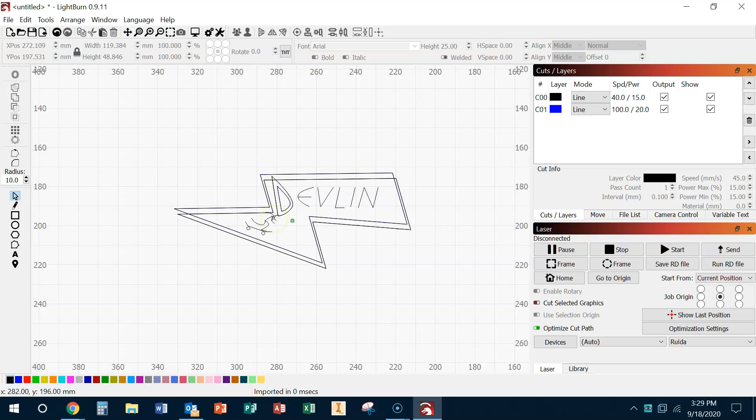When I load this in, it just brings it in as lines, which is fine because that's technically what we want - vectors. There's no colors; the laser printer doesn't have a color.

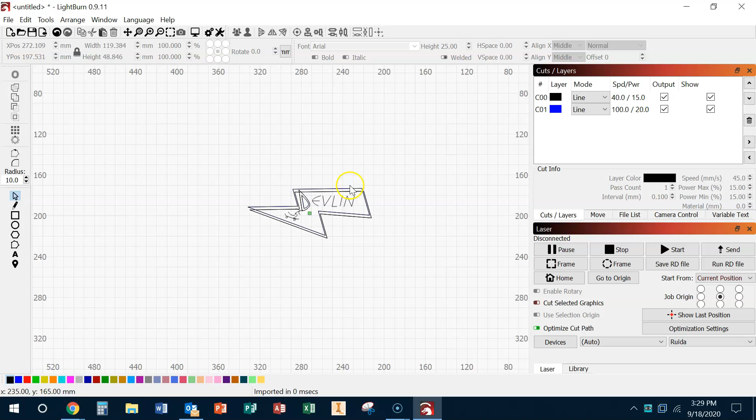So we have this, but what has happened up here is we now have all these layers and cuts. This is dependent on what we're 3D printing or what we're actually cutting. We control the speed and the power and whether it's outputted or not.

So one thing I like to do to keep it manageable is I'll normally make a square. Because Lightburn is not an American program, it'll stay in millimeters. Up here we have my rectangle that I just drew, dashed. I'm going to make this 4, and I can type in inches, and the longest dimension I want these to be is 4 inches at first.

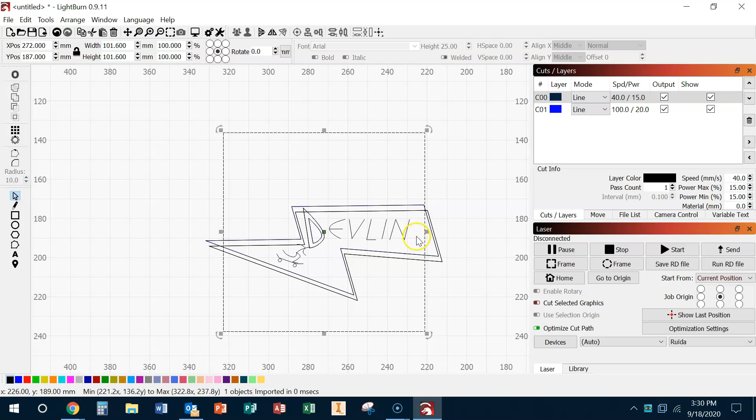It's going to keep that rectangular shape unless I click the lock. So then I can put 4 inches down below, making this a square that I want to keep everything inside of. Since we're not using very much of the 4 inches, if you really wanted to max it out, I'm okay with you squeezing this. But we just want to make sure we're not printing something super big.

So you can either delete this, or if you change the color of it - I'm going to change it to yellow - that will take that box and put it on its own layer, and I'm just going to unclick output, so the laser will not print that.

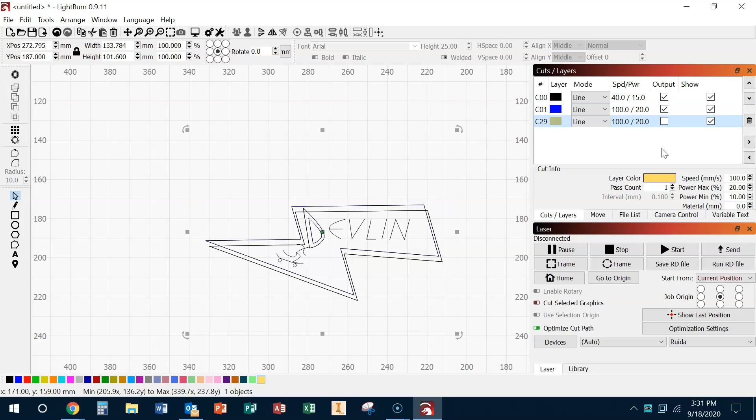Now if we put this into a piece of paper right now, or a piece of cardboard, if we print this out, we don't really have anything that will cut it out, so we need to make our cut line.

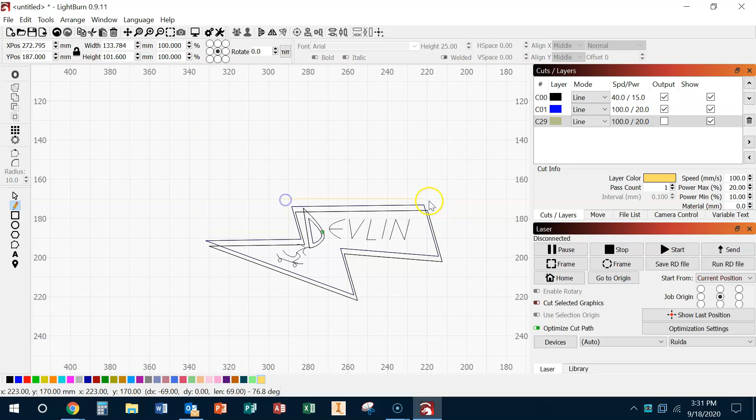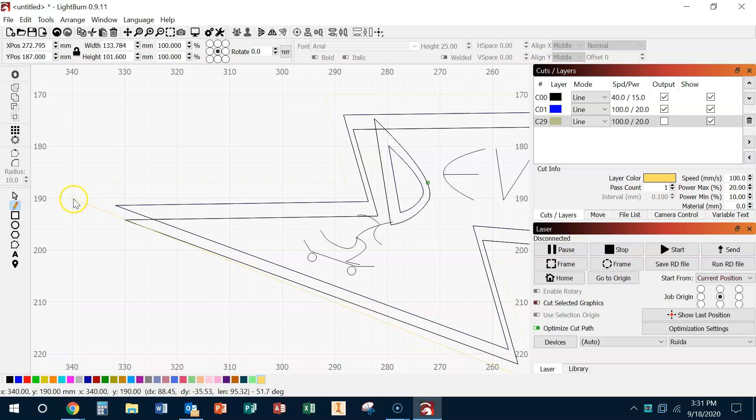So I'm going to use my line tool, and I'm just going to create a line that's just outside of my whole project. I'm going to go a little bit further down - you can roll your mouse wheel to zoom - and I'll end it right there.

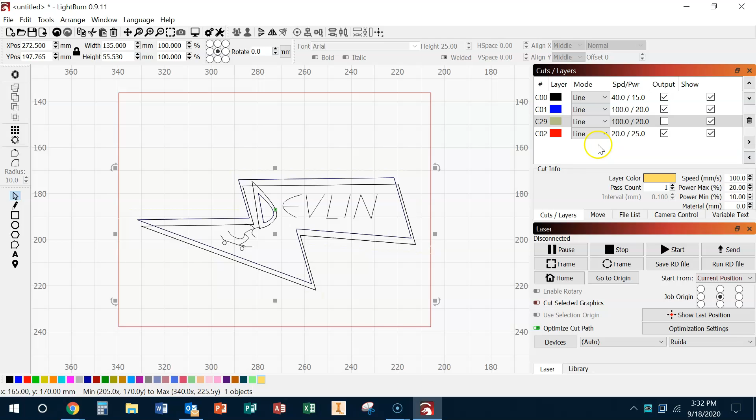So now this changed to that yellow color that we're not outputting, so I'm just going to choose a different color from here - let's say red. That's not what I wanted. We've got to end our tool by going back to our arrow, and select anything. So I want this one to stay yellow, but I want my line that I just made to be red.

And why this one keeps changing, I'm just going to erase that because we know what size it is now. So now if we're cutting on cardboard, we have to mess around with what the speeds are, and they're all different. So if we don't want to cut through the cardboard - I don't know what is blue, I guess that's blue.

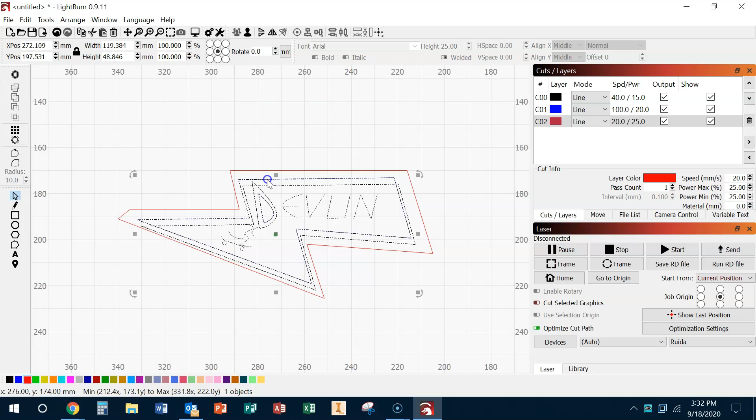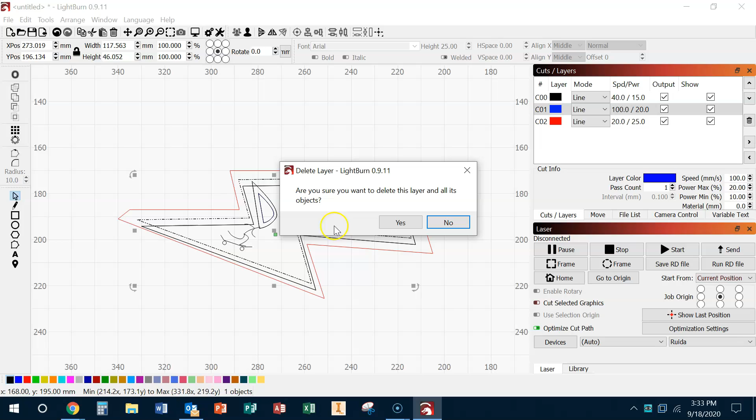So I'm going to ungroup this - I think it all came grouped - so I'm going to ungroup and then change this to black. And I'm just going to try and delete this. That didn't delete anything; I don't know what that blue line was doing.

Anyways, so the black line is going to be just engraved, so we're going to pick a really low power for that since we're doing this on cardboard first. So I double clicked on black and I'm going to change the speed to something fast, like 60 millimeters per second, and the power to 10, and I need to change both of those. Make sure both change to 10 and we'll keep it line.

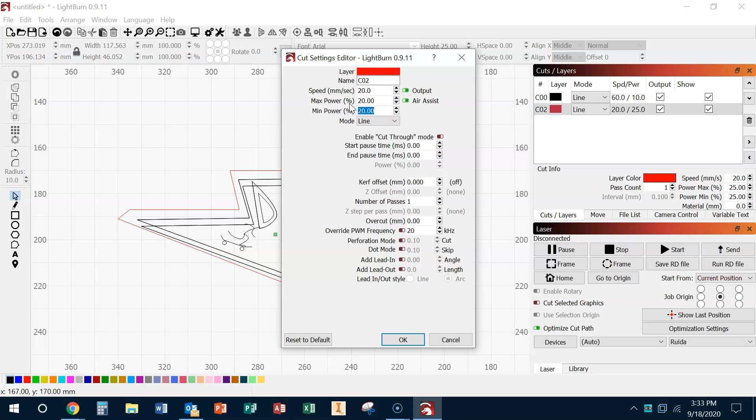I click OK. Now the red, we want this to cut through. So for cardboard - I have a piece of paper in the back that will list these speeds and powers depending on what we're cutting - for red we want to make sure this cuts, so I think 20, and then a power of 20 should be good. So we'll do 20, 20, click OK. Alright, so now it's going to draw everything that's black and then cut out what's red.

So once we have it all done, there's a couple things we need to pay attention to down here. Our origin, that's going to be where it starts - we can either do it in the middle or at the left corner, that's up to you, you can change that. That little green dot is where we want to put the laser when we focus it, and then the rest of it will just go. So we're just going to keep center, I think that makes it easier.

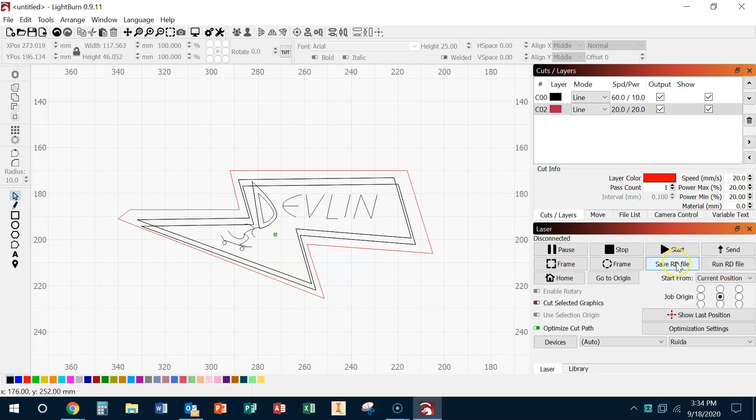And so this is all ready to go. So now we'll do save RD file, and you'll save this onto a flash drive and then walk back to the laser, and I will teach you guys how to load your files in. So that's how it works.